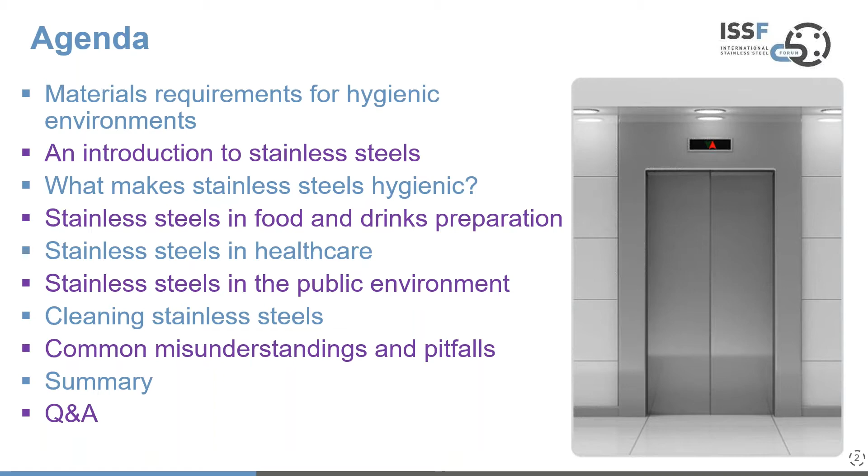So we'll start first of all by looking at the material requirements for use in hygienic environments, and we're using the term hygienic in its broadest sense here. And really the material requirements can be boiled down to three relatively straightforward things.

The first requirement is really that materials used in hygienic environments are both neutral and inert, and that is considered from a chemical, a bacteriological, and an organoleptic perspective. And organoleptic really is about the sort of impact on the senses. The material shouldn't impart tastes, smells, or anything to whatever it is interfacing with. And in the illustration here, we're using foods as a good example of that.

And behind this requirement, there are a number of things to consider. Over quite many years, the awareness of people, whether it be in a professional capacity or in the public domain, on the impact of materials used in these sorts of applications has grown significantly. And that runs across three examples here: food and drinks manufacturing and consumption, healthcare, and domestic applications. So we have a more knowledgeable population than we did several decades ago.

But equally, it's fair to say that some materials are distrusted based on true scientific evidence. And whilst aluminium is a fantastic material, used in cooking, it has been clearly linked to the early onset of Alzheimer's disease, which is something that's somewhat sad, but is understood now, which is another good point.

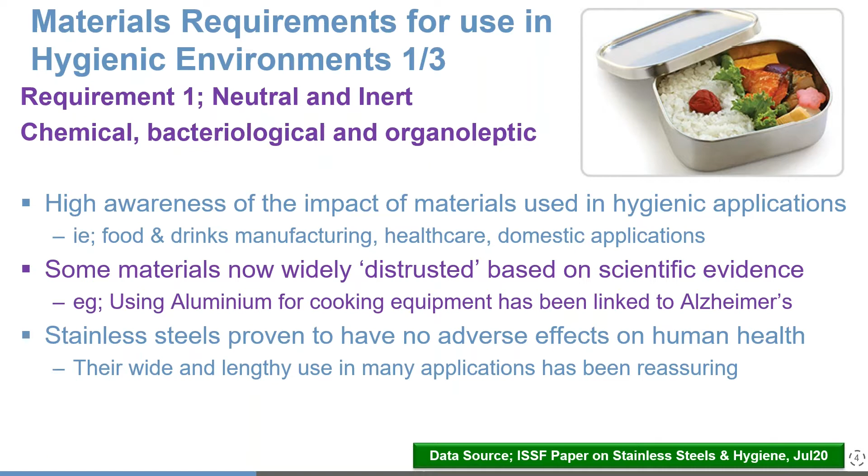However, stainless steels have been proven over just over 100 years now to have no adverse effects on human health, and their wide use and their lengthy use in many applications and usage sectors has been a very reassuring feature of this family of materials. So that's the first requirement to set the scene.

Requirement two is that the material should be obviously hygienic, but cleanable as well. And what we mean by those two elements combined is that the appearance of the product is guaranteed time and time again. It doesn't deteriorate over time. But when we talk about hygienic and cleanable, we really mean that the elimination of both visible and invisible surface contamination is relatively easy to do. So it's about simple cleaning, but in a manner that guarantees destruction of microorganisms.

And often the simple cleaning that people believe to be simple, maybe using just a straightforward soapy cleaner, does not destroy all microorganisms. So something more intense is needed, something that has disinfecting capabilities. And when we talk about disinfecting, we're talking about reducing the microbial population to very, very low levels.

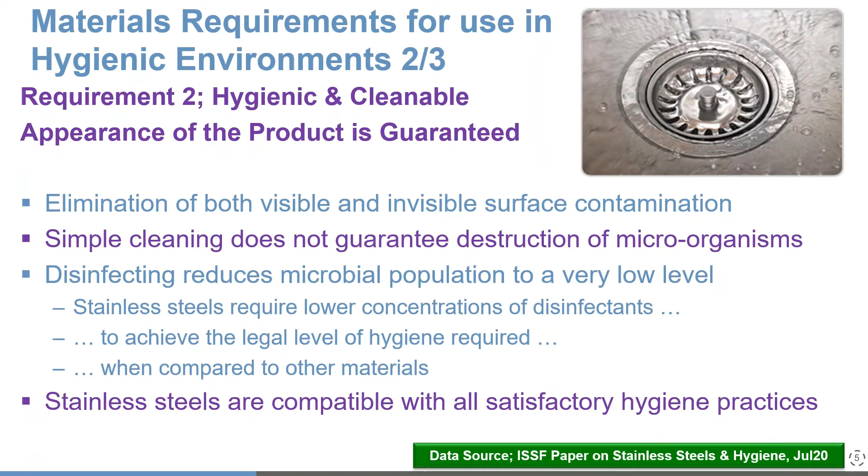And one of the benefits of stainless steels here is that because of the nature of their surface, which I'll talk about in a little while, these require lower concentrations of disinfectants to achieve the legal level of hygiene that's required, particularly when compared to other materials that have different surface topographies. So stainless steels, it's very clear to say, and clearly based on evidence, are compatible with all satisfactory hygiene practices. Now let's look at the third element, and this is about durability and resilience.

So the requirement here is to ensure that the material that is used does not suffer from corrosion or what's known as surface aging. And surface aging is perhaps better described as aging oxidation. And an example of that people have probably seen on many occasions is the green patina that forms on copper. It is an aging type of oxidation.

Now, we're not talking about creating aging oxidation features that look exactly like that, that's an advanced form, but at least it gives an impression of the sort of thing that we need to avoid in these sorts of environments. So if that aging oxidation feature occurs, it suppresses any antibacterial or antiviral properties that the material may possess, and cleaning itself becomes a more difficult and intense task.

Again, one of the benefits of stainless steels is that they have this invisible self-repairing passive film that resists corrosion and is highly adherent to the surface layer, which makes cleaning and disinfecting much more straightforward. And on top of that, many different stainless steels exist that allow the users to select the optimal choice of material for the operating conditions and any corrosive environments that exist. So stainless, again, is a good fit against this notion of durability and resilience.

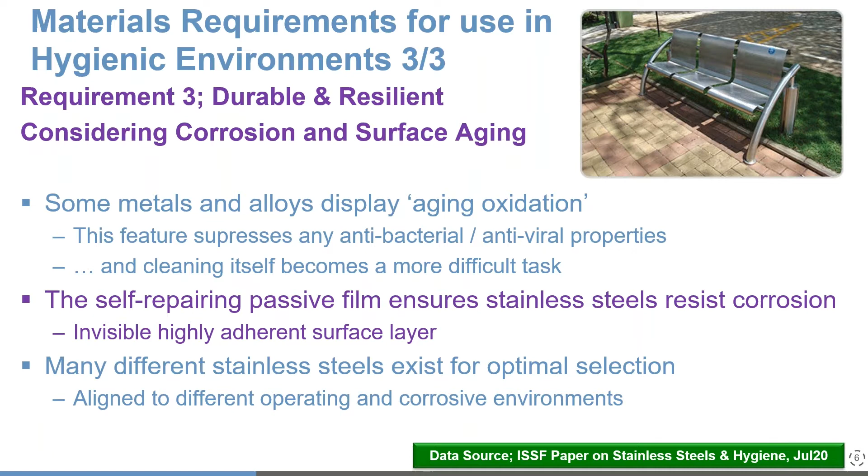So now we've set the scene with the prime requirements for materials in hygienic applications, and particularly stainless steels. What really do we understand about stainless steels? So here's a simple introduction. It's not meant to be in depth, and for people that are fairly unsure about stainless steels, it will provide a useful opening guide.

So first of all, the history. Stainless steels were invented a little over 100 years ago, primarily in Sheffield, but also with German and American versions coming along at similar times. But it was steelworks metallurgist Harry Brearley who created the first patent for what was then called a rustless steel. And they're a family of steels containing a minimum of 10.5% chromium. There are 4 basic strands to the overall stainless steels family, and today we have somewhere over 100 different stainless steel grades available. It's not one thing, it's many things.

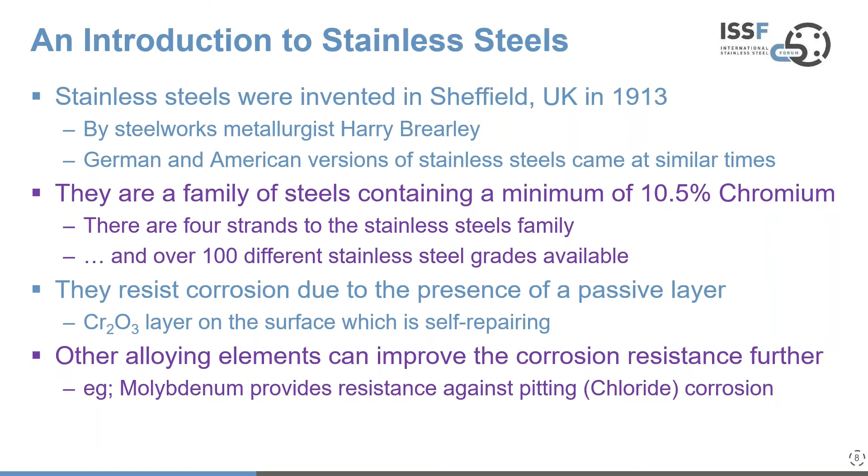They resist corrosion due to the presence of a passive layer, which I briefly mentioned. And this is a chromium oxide layer on the surface, which is self-repairing in the presence of oxygen. And it's possible to increase the corrosion resistance further by adding further alloying elements to the analysis. Molybdenum, as an example, provides great resistance against a feature known as pitting corrosion, which occurs in chloride or highly oxidizing environments. So having set the scene, I'd like to talk about chromium, because from a corrosion resistance perspective, first and foremost, it's all about chromium.

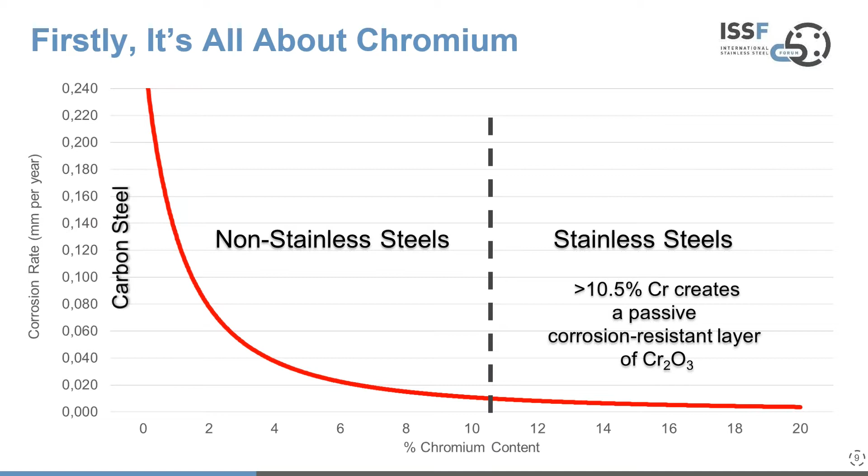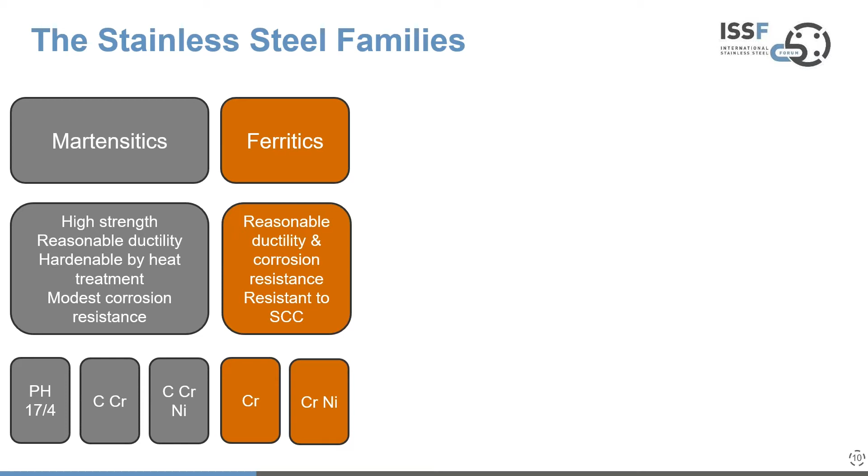So let's now look at the stainless steel families, and there are 4 groups, as I said. The martensitic group, and this is where it all started with Harry Brearley in 1913, and these are high strength, reasonable ductility products that have modest corrosion resistance. We wouldn't say good or excellent at this stage. Then you have the ferritic group. These have lower strengths but reasonable ductility and reasonable corrosion resistance, and they're resistant to a phenomenon known as stress corrosion cracking.

And then we jump to the right of this with the austenitic group that most people are more familiar with, because you'll have come across terms like 18/8 stainless and 18/10 stainless, and maybe 304 and 316 as grade designations. These products have better strength, they're highly formable, they have good to excellent corrosion resistance depending on their alloy content, and they don't have a ductile to brittle transition as temperatures drop. So these are very much a utility group of stainless steels.

But sitting in the middle are the new kid on the block, the duplex grades. I say new kid, they're still around 90 years old, but they're the newest family of stainless steels that combine the best of both. It's the best of the austenitics and the best of the ferritics, really.

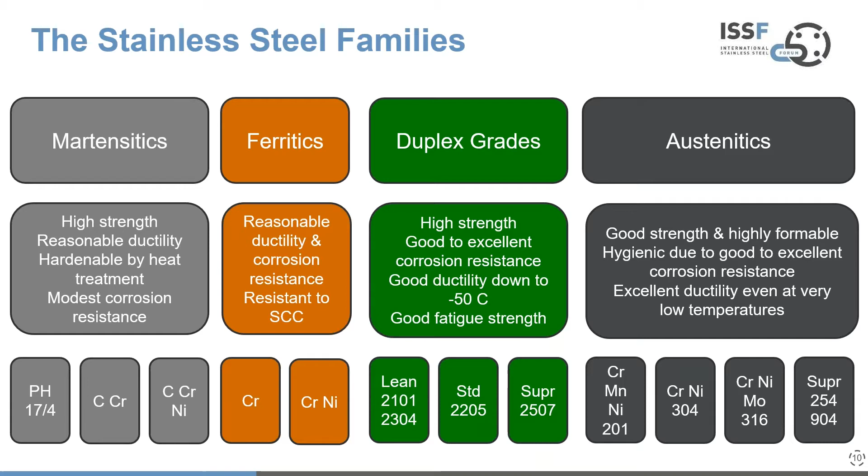So high strength grades, good to excellent corrosion resistance. They have good ductility. There is some transition, but it's suppressed. So good ductility down to minus 50 degrees centigrade, and good fatigue strength. So these are an excellent development of the stainless family, not understood by everybody yet, but form an important part of the stainless product range.

So now let's try and put some of that in context using one example. And this example is pitting corrosion, which occurs when you have fluorides, chlorides, hydroxides, and other strong oxidizing agents present. And this chart shows the strength represented by the proof strength on the y-axis on the left-hand side, and what's known as the pitting resistance equivalent number, which is derived from the chemical analysis. It's described in a little box in the bottom left-hand corner.

And basically, what you see here is carbon steel, which is shown as a comparative material, and this sits in the top left, so has good strength but weaker corrosion resistance. And I think we'd all understand that. We've seen rusty carbon steel throughout our lives. And then in the right-hand side, to the right of the red line, which is described as the basic chloride pitting resistance threshold, you have the duplex family of grades that combine both high strength and good to excellent corrosion resistance.

And then in the middle section, either side of the red line, you have the ferritic, austenitic groups, and aluminium thrown in just for another comparative material reflection in there. But what becomes interesting when you look at this middle group is that the 316L grade is just to the right of that threshold line, and that's a grade containing molybdenum. So molybdenum is known to resist pitting corrosion, and this is a feature of the duplex grades as well.

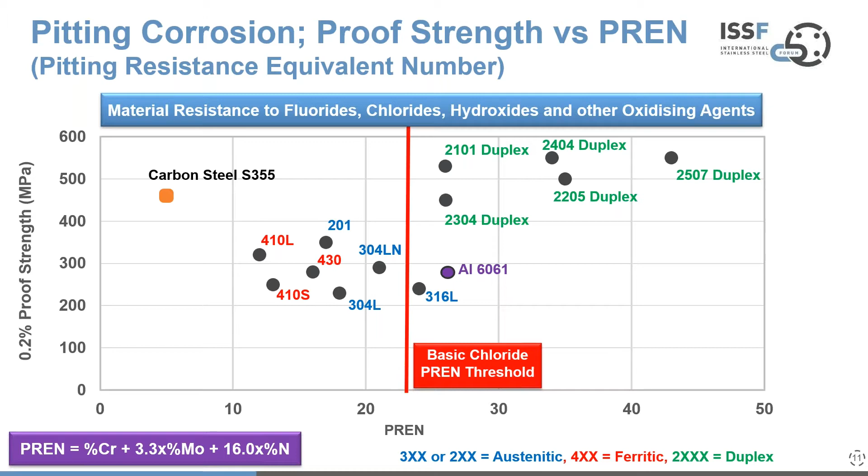So some stainless steels do not perform as well against certain types of corrosive environments compared to others, and that's an important piece of understanding. So I just wanted to set that out using this slide for clarity.

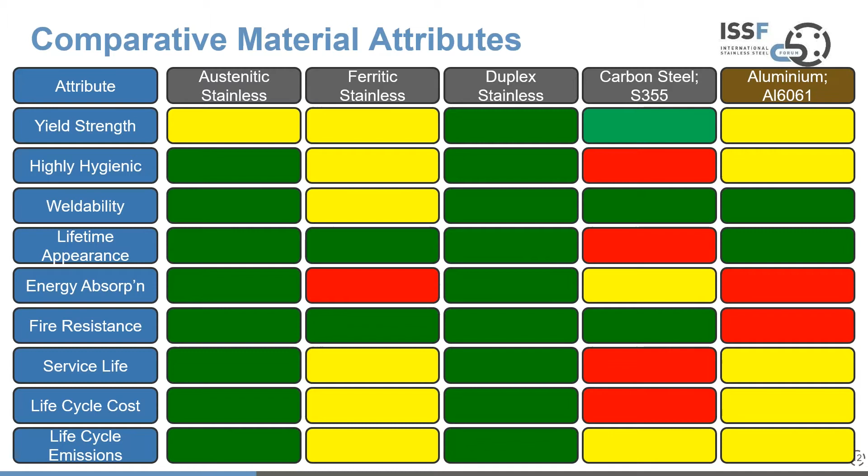Okay, so having just given a very quick introduction to stainless steels, I'll now talk about what makes stainless steels fundamentally hygienic. So it really starts with the passive film. I've touched on this earlier in the slides, but I'll talk a little more now. So passive films are transparent. You can see through them. They're self-repairing in the presence of oxygen. They are highly adherent, and they're really, really thin, 2 to 3 nanometers thick.

And you can see in the illustration there, you have the oxygen molecules in the air. You have the passive film firmly attached to the substrate material, in this case stainless steel. And even if you take some instrument to that, like an axe, and damage the passive layer, it soon replaces itself automatically. So removal of it temporarily just allows the passive film to rebuild in the presence of oxygen.

The alternative is a barrier layer, some kind of coating, whether it be chemical coating or painted coatings or whatever. And these layers tend to be opaque. They're not self-repairing. They do suffer from what's known as adherence decay. They come off over time. They tend to be quite thick, 20,000 nanometers or thicker. And they are more problematic in that they loosen and fail to adhere over time.

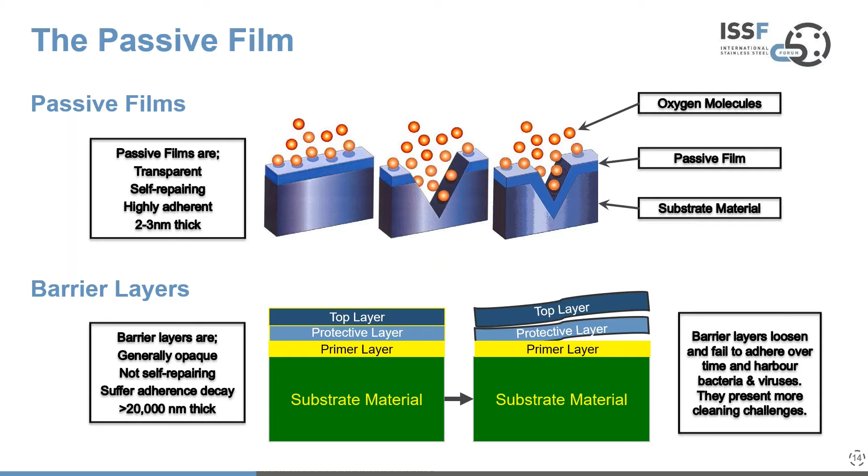They harbor viruses and bacteria unless you choose something quite expensive. And this clearly presents more cleaning challenges. They tend to be porous to some degree, whereas the passive film is generally not porous. So if we put the comparative differences side by side, you can see that passive films or passive layers, however you term them, are an inherent part of the material. They're invisible and thin, highly adherent, not really porous, highly wear and damage resistant.

They self-repair if damaged, really easy to clean. They do not harbor bacteria, and they do not allow viruses to survive. And that survival is reduced with regular cleaning too. I'll come on to that a little later.

By contrast, barrier layers, you have to spend money to put them in there in the first place. They're visible and thick. They have weaker adherence to the substrate material. They tend to be porous unless they're highly bespoke. They offer limited wear and damage resistance. They need repairing if damaged, because from a hygiene perspective, it opens you up to all sorts of challenges. Cleaning itself, if it's reasonably aggressive, can loosen those layers, and they're known to harbor both bacteria and viruses. So in simple terms, I'd say it's a thumbs up for passive film and a thumbs down for barrier layers.

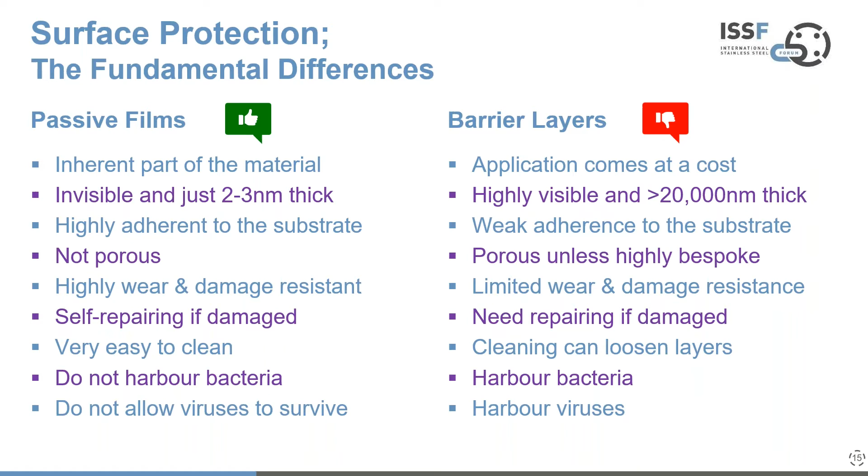But what are the hygienic benefits? We know the passive film now is self-repairing in the presence of oxygen. We know it's highly adherent. That's been described already. But one of the strengths of stainless steels is they can be hygienically cleaned with simple disinfectant products. And cleaning twice a day will accelerate resistance to both surface bacterial and virus longevity and infectability. And we need to recognize that detectability of viruses and infectability are two very different things.

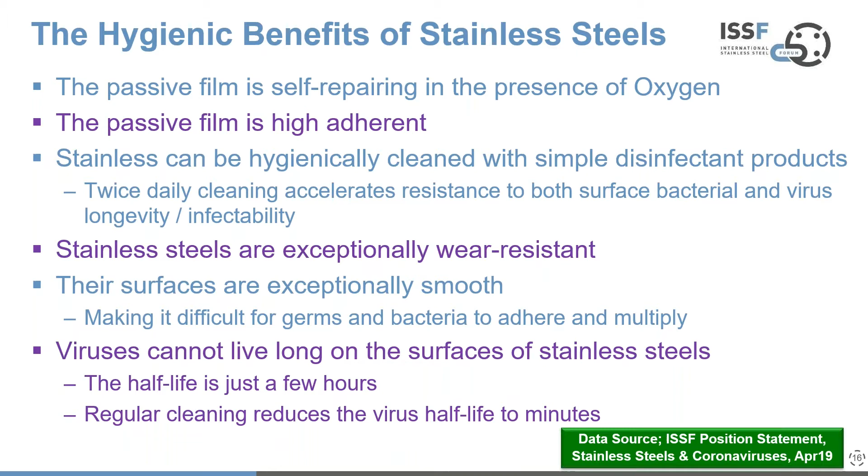Stainless steels themselves are exceptionally wear resistant. Their surfaces are really smooth, so that makes it difficult for germs and bacteria to both adhere and to multiply. And viruses do not survive too long. The half-life of a virus on stainless steel surfaces is just a few hours. It's longer than some other materials like copper, for sure, but with regular cleaning, the virus half-life reduces to minutes in quite a quick period of time. So I would advocate twice daily cleaning will then reduce your virus half-life to under 30 minutes, which is quite impressive. And that gets better over time, as I've said.

Now, if we move on, having described why stainless steels are fundamentally hygienic, let's look at 3 different application sectors, and we'll start with food and drinks preparation.

So first of all, let's talk a little bit about regulation. In Europe, the framework of regulation, EC 1935-2004, requires food contact materials to be safe. What we mean by safe is that they must not transfer their constituents to the food in quantities that could endanger human health or change the food composition in an unacceptable way or deteriorate its taste or odor. So this starts to bring together those 3 features that I talked about in the opening of this presentation. And the Council of Europe produced new guidelines in 2013, so not that long ago.

Within that, there were defined specific release limits for the constituent elements of materials, which in the case of stainless steels, we'd look primarily at iron, chromium, and nickel. There are other materials, but I'm going to use these as illustrative of what contents or what levels are released. But also in this new guideline was a new testing protocol using a solution of citric acid as a food simulant, and that replaced, from a corrosion perspective, acetic acid that had been used previously. Citric acid is more aggressive, so this was seen as a tougher test.

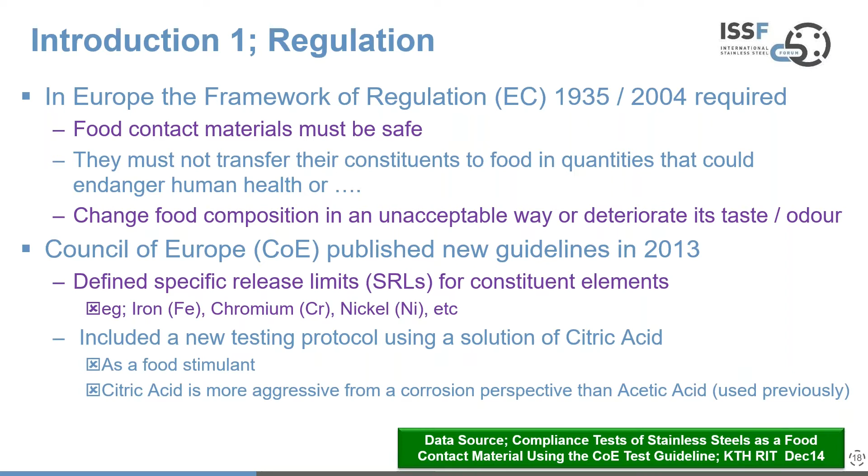Now, in 2014, an independent study was carried out to look at the continuing safety of using stainless steel in food preparation. That was undertaken by the KTH Royal Institute of Technology in Sweden. They followed the outline of the COE testing criteria that was imposed across Europe, and they looked at the defined specific release limits, which I'll describe shortly on the next slide, for metals and alloys, including the new, more aggressive test using citric acid, as I've mentioned.

We were essentially saying we had a pH of 2.4 using 5 grams of citric acid per litre of liquid. This reflected what was commonly present in both acidic and alkaline foods. And the first part of the test, there were several parts, but the first part, which I'll illustrate, was based on exposure of the material to this aggressive test over 2 hours at 70 degrees centigrade.

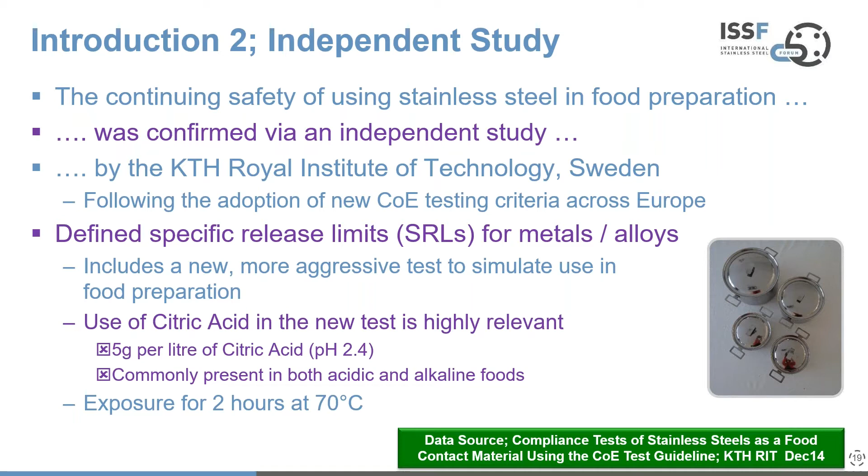So I'll describe the findings and then show them in a chart. From the findings, none of the constituent alloying elements of stainless steels were released in any amounts exceeding or coming close to the corresponding release limits, as stipulated in the protocol. What was interesting is that as time progressed, particularly beyond the first 2 hours of measurement time, the metal release rates actually decreased. That was observed to be due to a gradually improved passivation of the stainless steel surfaces. So the passive layer actually became more resistant to metal release as time progressed, and therefore the released metals actually diminished over time.

Now, it's important to note that the limited release of the constituent alloying elements is controlled both by the passive film present on the surface, and also by the alloying or matrix effect, which firmly sequesters those alloying elements within the atomic matrix. Other tests simulating how these materials behave when exposed to gastric juices, carried out by the European Scientific Advisory Council, verified this same outcome, showing that the metals are only released in very low levels.

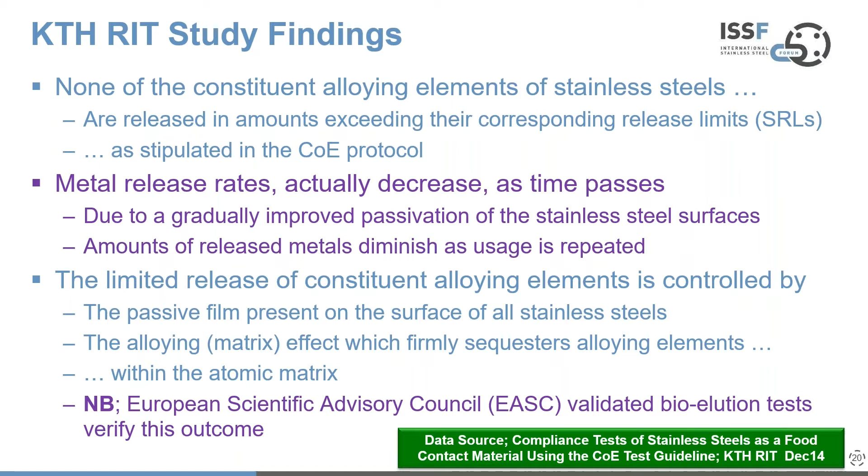I'd now like to illustrate that with the findings for 3 metal constituents: iron, chromium and nickel. There were 7 different stainless steel grades in the study. The first 2, the ferritic grades, had effectively 0 nickel, so could not be assessed against the nickel release component. But what you'll see, looking at the bottom, are the specific release limits: 40 micrograms for iron, 0.25 micrograms for chromium, and 0.14 micrograms for nickel, all in micrograms per centimetre squared.

The release rates didn't even come close to these limits in that first 2-hour period, and as I've said, diminished thereafter. So everything here was a comfortable green tick against this tougher test that had been brought in in 2013. I think that gives us comfort that stainless steels are a very good hygienic material that don't have an impact on food or drinks preparation.

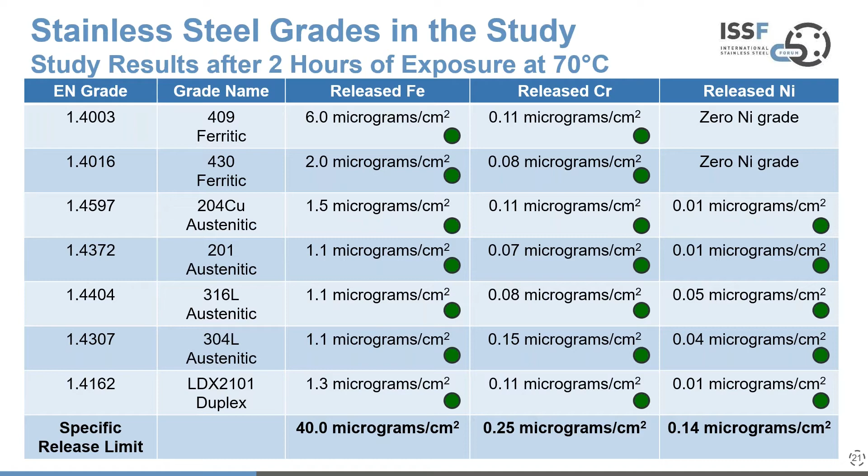So in summary, it's safe to say that beyond having a long, safe and trusted history as a contact material for food and drinks, both within professional environments and also within the home, stainless steels are inert and offer a very long service life that is essentially maintenance free. Regular cleaning and, where appropriate, disinfection is important, but beyond that, not much is needed. As a material group, they're fully compliant with all the current global regulations for food contact material, and the passive layer and alloying effect ensures that constituent metal releases are well below those regulatory thresholds.

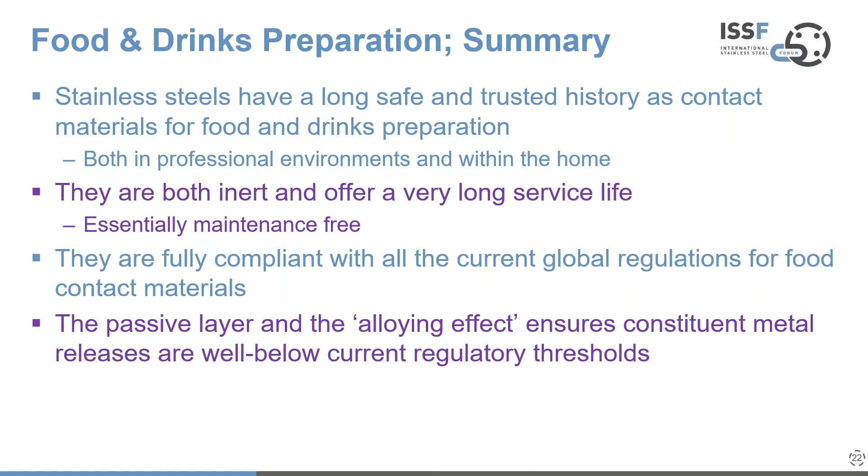And that's applicable all over the world. I use the European data for illustration, but it doesn't change wherever you are.

So now let's move forward and consider the demands of healthcare. Healthcare related infections are driven really by 2 things: material choices and cleaning and disinfection regimes. It's important to consider these side by side, hand in hand.

Good cleaning and disinfection regimes are absolutely critical in healthcare, and that applies to all material surfaces, whether it's instruments used in healthcare, touch surfaces, implants, room walls, anything. What's important here, and I touched on this earlier, is the surface topography of the material.

It's a critical feature because the surfaces need to be favourable to thorough and easy cleaning. What we mean by that is complete removal of microorganisms and associated biofilms that support the growth of those microorganisms. And equally, over time, that surface topography must not deteriorate.

Furthermore, the surfaces must be both wear and impact resistant, because wear damage and impact damage actually support bacterial and virus longevity in many materials. So that's an additional feature on top of the surface topography.

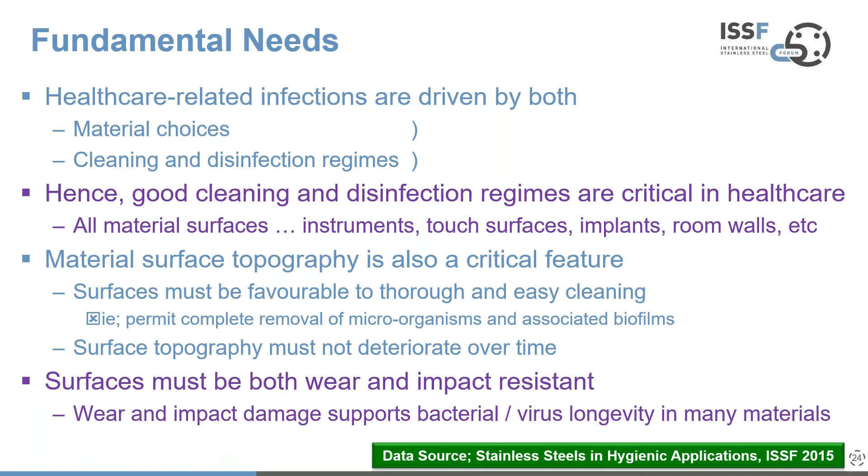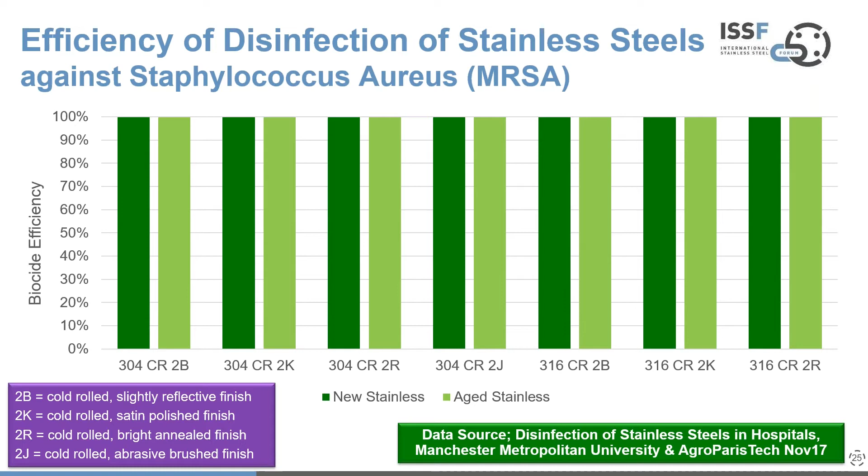And then we have 2 categories of stainless: brand new stainless at the moment of installation, and aged stainless some years down the line, having been in service for some time. What's impressive is that the biocide efficiency is close to 100% for all these materials, and the aged performance is no different to the new performance. So this is a method of verifying that stainless steel throughout its operating life is still disinfectable to a very high degree of efficiency. This is a really good test that demonstrates the material is suitable for healthcare applications.

Now, we know about alternative materials in these situations, and they are used, but it's fair to say they have some challenges as well. Antimicrobial surfaces are not effective against all microorganisms, which presents a challenge, and antibacterial efficiency of these materials is frequently overstated. The assessment method for looking at effectiveness does not identify dormant cells which can become live at some point in the future.

So it's not without some challenges, even though there are some positives to antimicrobial surfaces.

Similarly, silver-containing coatings, which are initially very effective, and arguably better than stainless steels at the start, do wear off easily. So you've not only got a high cost to pay for these products, but you've also got the challenge that wear brings over time, and the imperfections that result from surface wear harbour bacteria and viruses. And with silver-containing coatings, you have no visible indicators when the antimicrobial effect begins to fail. So again, some challenges because the problems are not visible.

And then last we come to copper and its alloys in this trilogy of alternative materials. Copper is expensive. It is not a cheap material. It's less wear resistant when compared to other materials. However, it does rely on the release of copper 2+ ions, which at the start is fantastic and copper is really effective.

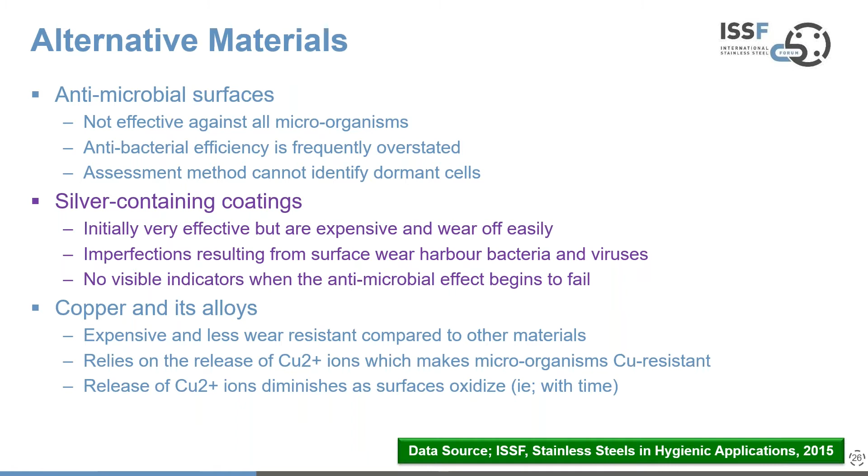So to summarize from a healthcare perspective, stainless steels are really easy to clean and sanitize, even after decades of use. Less cleaning materials are required compared to other surfaces, particularly those that are more susceptible to damage and/or less smooth and hard.

The topography of stainless steel is really favorable for cleaning, and the non-porous passive layer assists in that process. Stainless steels are completely inert, so they don't support the notion of resistance-forming microorganisms, and that's something other materials are known to do.

Stainless steels are both wear and damage resistant, and the passive film reforms in the case of damage, and both critical or widely used sterilizing techniques, either chemical or thermal, can be used on stainless steels with no ill effects. So a good all-round performance, although I must stress cleaning and sanitizing is an important part of working with stainless steels.

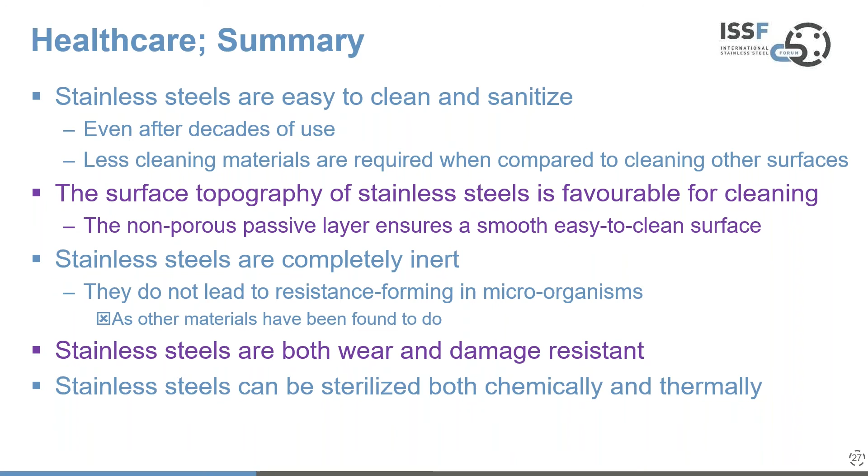So now in the final element of our trilogy of the use of stainless steels in hygienic type applications, we'll look at the public environment. And I'm sure you've all seen in the public environment, stainless steels are all over the place, whether it be doors, door furniture, handrails and barriers, restrooms, seats and benches, things to do with moving people around, elevators, escalators, etc. Building facades and structural cladding are popular in stainless, and equally decorative features, whether that be inside or outside buildings. So stainless steels are becoming commonplace in the public environment.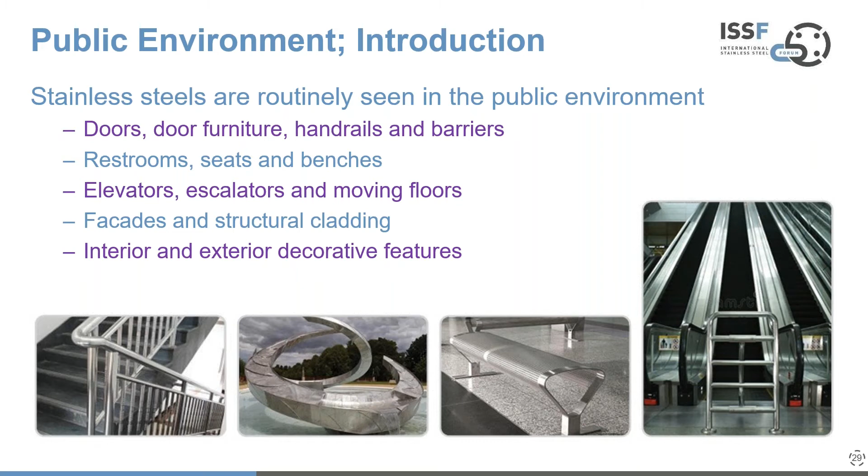But why would you choose stainless steels for these applications? We know they're hygienic now. Well, what else is important? Being easy to clean, which we've talked about, being inert, so that there's no impact on people touching and picking up viruses or bacteria from these surfaces.

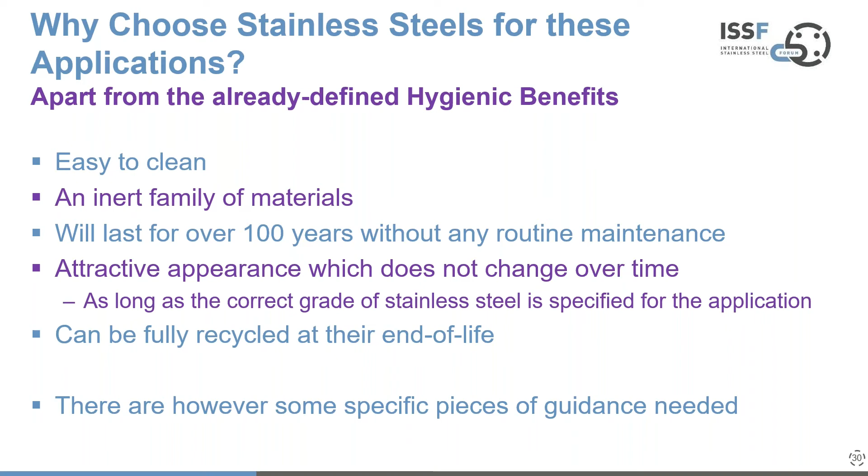They'll last for over 100 years without any routine maintenance when correctly specified, and their attractive appearance does not change over time. So they will look, as long as they're appropriately specified, just as good on day 1000 as they looked on day 1. And they can be fully recycled at the end of life with no real concerns, no loss of attributes, etc. But there are some specific pieces of guidance needed when thinking about stainless steels in these sorts of applications, and I'm going to illustrate 2 of them now.

So the first one is something called crevice corrosion, which is not understood. And that's because people don't actually perceive a crevice in the true sense. A crevice is a confined space. What we're talking about here is gaps in and contact areas between material parts.

What happens here is that moisture gets between the washer and the surface of the material, and it leads to an electrochemical reaction occurring in that crevice. Then the metal faces in the crevice, both the washer and the substrate material below, undergo uniform corrosion.

There are simple things you can do to avoid this, but it's often not understood. I'm sure many people have seen examples where you think, hey, that looks a bit poor when it's supposed to be stainless steel. But it's because people don't understand about crevice corrosion, how it occurs, and what a crevice actually is.

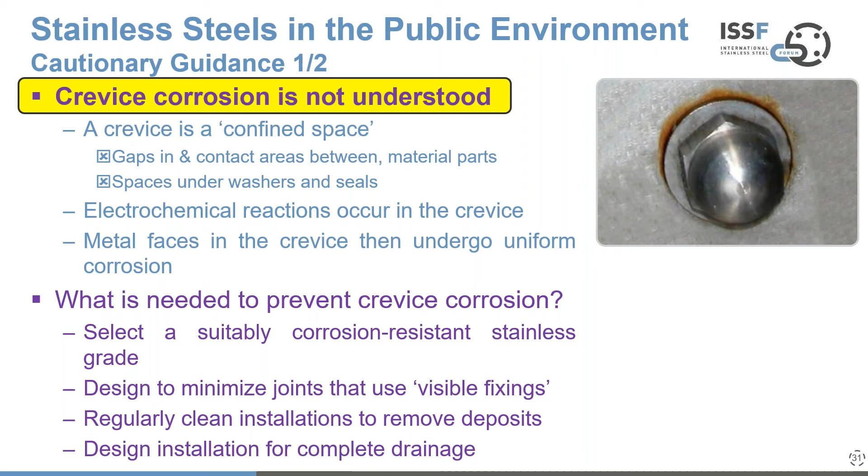Regular cleaning of installations will remove deposits, because the deposits are part of the process here. Fine particles get into these crevices, but also design the installation for complete drainage, because simple condensation will start to cause a problem in this situation, as it will drag deposits into those crevices.

So it's important that these things are understood and designed out. The second example is that something called galvanic corrosion is not recognized.

Galvanic corrosion is described as corrosion that occurs when 2 metals or alloys that have very different galvanic potentials are in contact, and they become connected by a conducting liquid, an electrolyte, which includes humidity. Then what's known as the least noble metal or alloy is attacked, and we can see that in the pictures, and it corrodes.

So how do you avoid this? Well, avoiding having dissimilar metals in contact with one another is the obvious starting point. Never use carbon steel fixings for a stainless steel product - don't have the carbon steel washer as shown in the bottom photograph. Always use a stainless steel washer, and then you get rid of the dissimilar metals problem.

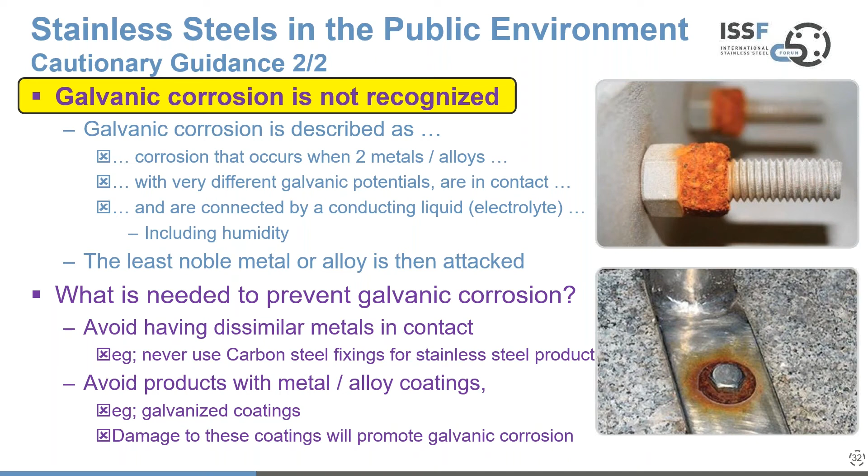So in terms of the public environment summary, what I'd like to say is stainless steels are without a doubt a wonderful material for public installations, and we're seeing more and more of them. Their hygienic characteristics are supreme, we know that already, and they're relatively easy to keep clean, and they're essentially maintenance free when designed and specified correctly, and that's the critical part.

But their sustainable credentials are probably the best of all man-made materials. They're fully and infinitely recyclable with no loss of attributes. They have very low production and life cycle emissions footprint, and it's the life cycle emissions footprint that's important. And their life cycle costs are generally somewhere around 20% lower than other possible material choices, because they don't attract attention and maintenance and replacement and titivation, as I would say, over their operational life.

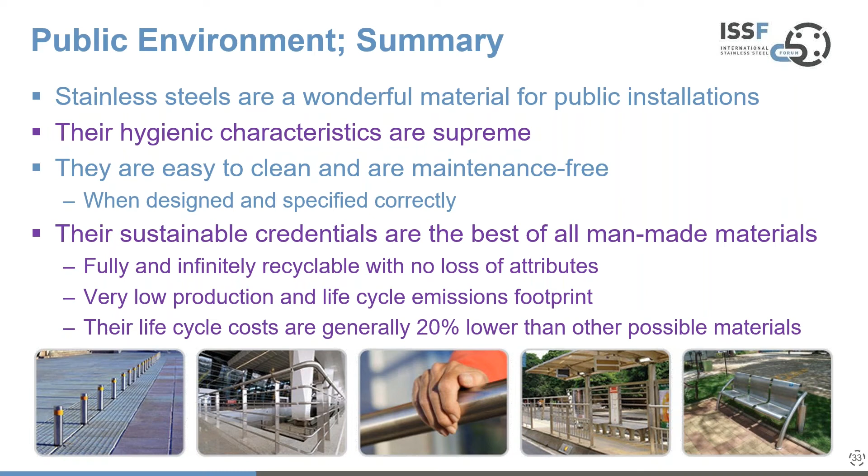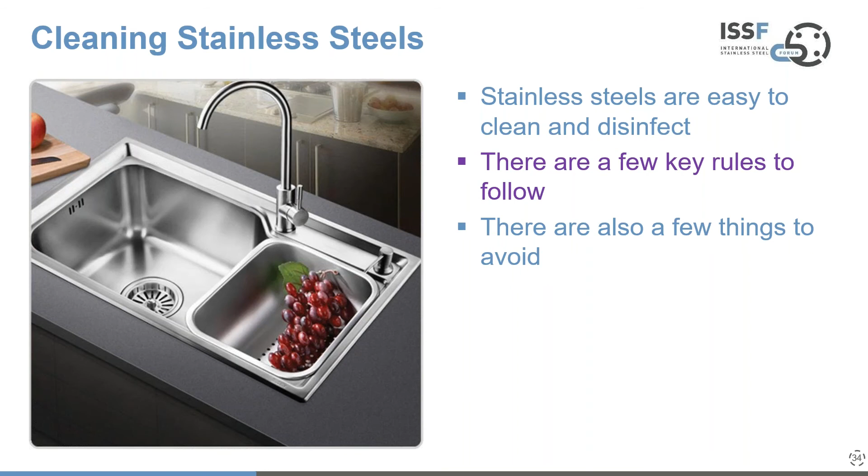Now, I'd like to move on as we get towards the end of this webinar to look at two further aspects. One is cleaning stainless steels, and stainless steels are easy to clean and disinfect. There are a few key rules that we need to know about, and there's a few things to avoid.

So we'll start with cleaning materials. Generally, you should clean stainless steels with soft sponges and microfiber cloths - that's the primary choice. It is possible to use stainless steel scouring pads, but with care, because you have a high risk of developing surface scratch marks. But used with care, they'll be effective.

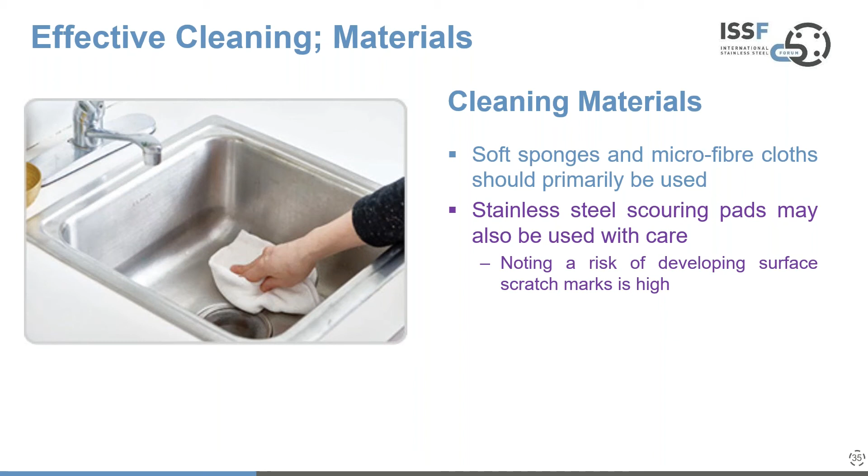If you're working with tea stains or similar residues, boiling water and sodium carbonate will work, allowing 10 to 15 minutes for that solution to be effective. And if it's coffee deposits, then you need boiling water and baking soda, with a similar amount of time, about 15 minutes, for the solution to work effectively.

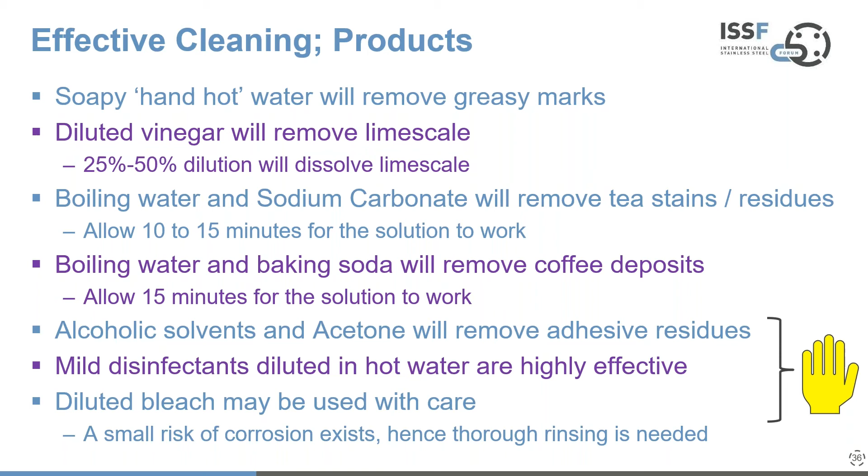Mild disinfectants in hot water are also highly effective, both from a removal of residue and a disinfection perspective, if that's what you need. Diluted bleach may be used, but with care, recognizing there is a small risk of corrosion here, so you need to thoroughly rinse the surfaces afterwards.

But there are some things to avoid. Concentrated bleaches are worth avoiding because they're likely to promote pitting corrosion, which I talked about earlier in this webinar. Salt or cleaning products known to contain chlorides will also promote pitting corrosion. Hard abrasive scourers will leave scratch marks on the surface, and that's unattractive, so not desired.

Then a couple of things that you must avoid at all costs. Wire wool or iron scouring pads are really unsuitable. Not only will they scratch the surface, they'll destroy the passive layer and promote corrosion, because the passive layer will be contaminated by the iron and cannot reform. Silver dip cleaners are equally unsuitable because they usually contain strong acids and chlorides, so again they start to damage the passive layer. These are the things to walk away from. Don't use these, please.

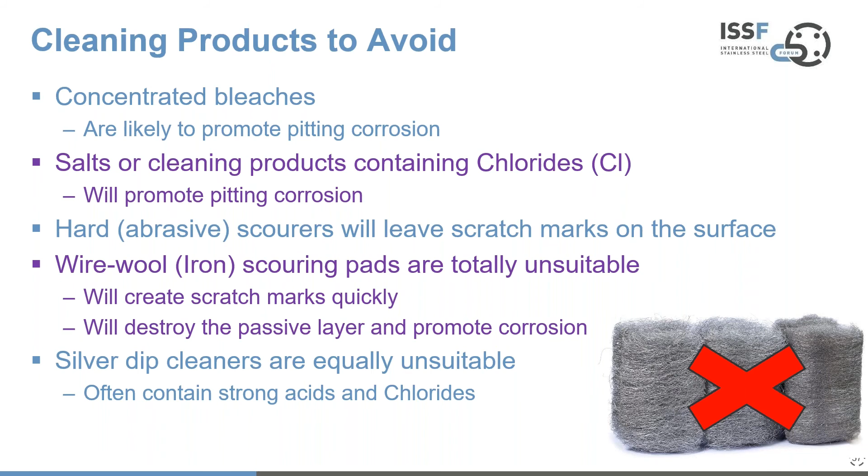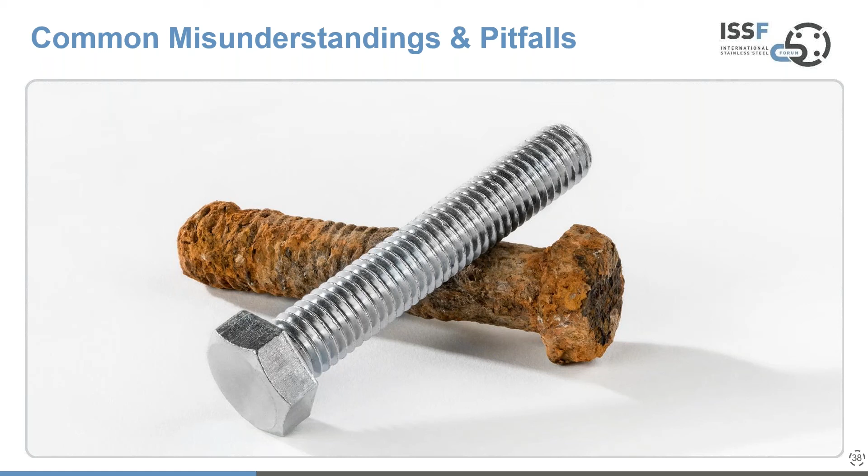Now, I'd like to wrap up before we get to the quick summary with a look at some common misunderstandings and pitfalls. There are 4 common misunderstandings.

Stainless steels are expensive, so I'm not going to choose them because they're just too expensive. Well, yes, their upfront costs are higher, but life cycle costs are much, much lower. When choosing stainless steels, you should be choosing for a maintenance-free life and a need to not replace on a regular basis or not maintain. So I would say that's a red cross. That's wrong.

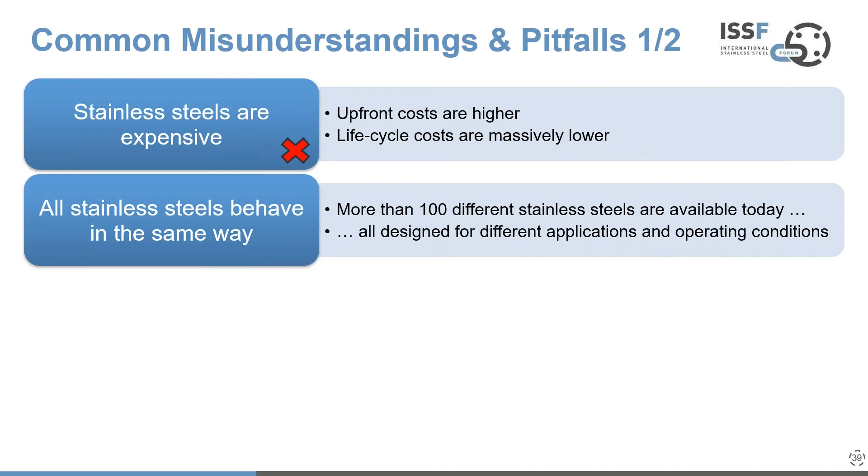All stainless steels behave in the same way. Given that we have more than 100 different stainless steels available today, and they're all designed for different applications and different operating conditions, they don't all behave the same way. There are similar features about them, but it's about choosing the right product for the right application. That's where we, and producers of stainless steel, can assist in choice of appropriate grade. So again, a red cross.

Stainless steels do not rust or corrode. Well, unfortunately, if you specify the wrong type of stainless steel, it has a high chance of corroding in the operating environment. So you have to match the grade to the operating environment to avoid corrosion. Corrosion of stainless steels can be prevented—it's all about understanding your operating environment.

Lastly, using non-stainless fixings and fasteners is okay when you're working with stainless steels. I would say this is like offering garlic to a vampire—this is really a bad thing to do. An example I saw some years ago was a gentleman's urinal that had fallen off the wall 6 months after being installed using carbon steel fixings. That's just an indication of how quickly things can deteriorate when you get galvanic corrosion occurring. So another red cross.

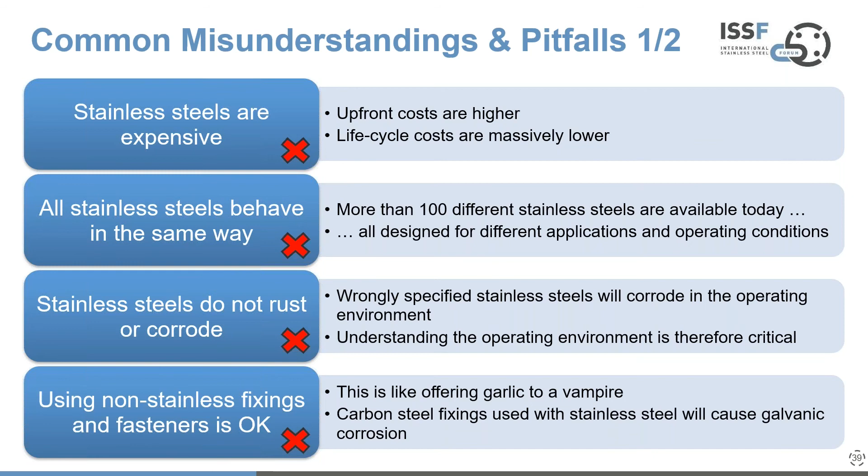The second part of this, I'd like to look at misunderstandings associated with healthcare, because this is particularly important. Healthcare related infections, and specifically those associated with multiple resistant microorganisms, are determined by factors other than just material selection. Whilst material selection is important, you have to consider several other things.

There's a number of things here, looking at 4 materials side by side: antimicrobial surfaces, silver containing coatings, copper and its alloys, and stainless steels. For these materials, if you look at their initial effectiveness, none of them are bad. Antimicrobial surfaces, because the performance is variable, would be classed maybe as reasonable. Everything else starts good. But then later effectiveness deteriorates for some of these products.

Antimicrobial surfaces probably not, because they're not starting top of the pops, so to speak. But silver coatings become poor because they're softer and wear away, and copper fades to only reasonable because the release of copper ions diminishes over time, whereas stainless stays good all the time.

Still remembering that you have to keep it clean. But then when you think about life cycle costs and wear resistance—other things that are important in the healthcare environment—the life cycle cost of stainless becomes really good because you don't have to replace it. It will last for a long, long time, even through multiple thermal sterilizations or whatever. And the wear resistance of stainless remains very good, whereas the other things are less good from these perspectives. So we have to put things in context side by side to do comparisons, and it's all about comparisons over time. What's good on day one is not necessarily good on day 101.

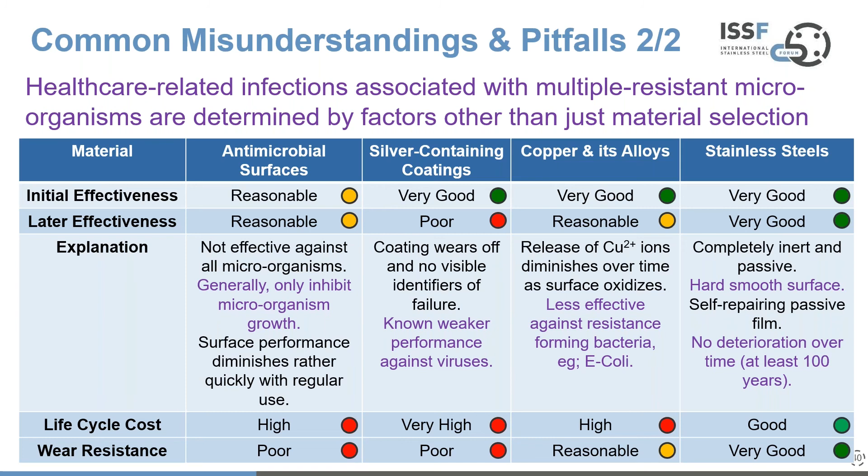So to wrap up, in summary, stainless steels play a significant role in sustaining this high level of hygiene in our society. And it's not by chance that many of the serious illnesses caused by poor hygiene factors have pretty much diminished in large parts of our world. The notion of the passive layer is one of the key things that helps stainless in providing this performance, because it's non-porous and self-repairing, and this gives this unrivaled anti-corrosion protection.

There is a series of stunning attributes to stainless steels, which are heavily relied on in many sectors, whether it be healthcare, pharmaceuticals, food and drinks preparation, and public spaces. And those attributes remain consistent over a long time. They are easy to clean. It's a few simple rules, and follow those rules and you have no problems.

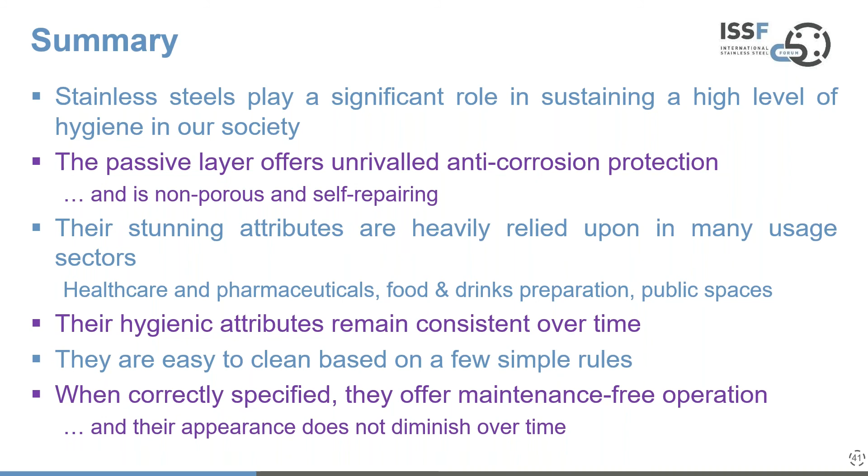And when you specify the right stainless steel grade for the right environment, they offer maintenance-free operation, which doesn't diminish over time. So I would argue that stainless steels for hygienic applications are a true partner in avoiding difficulties, challenges, and other problems that these types of applications face, and they serve our society well. So at that point, I'd like to end my presentation and open the floor to questions.

Thank you, Tim. No questions so far. Now there's a question coming in.

What is the most used grade? Well, that's an interesting question, because from a simple perspective, the 304 grade is probably the most used grade across all applications. However, when you start to consider specific issues, let's take pharmaceutical manufacturing as a case in point, the pharmaceutical industry will tend to prefer to use 316L stainless. This is an austenitic grade with chromium, nickel and molybdenum to avoid pitting corrosion, to get that guaranteed corrosion resistance year in, year out without any maintenance.

And equally, if you're thinking about urban environments, particularly coastal environments where you have saltwater sprays from the sea, you would definitely want a molybdenum-bearing stainless steel as your primary choice of material. So whilst the 304 grade is probably the most used stainless all over the world, you have to think about your environment and your application when choosing the grade. So most used is interesting, but it needs to be kept in context.